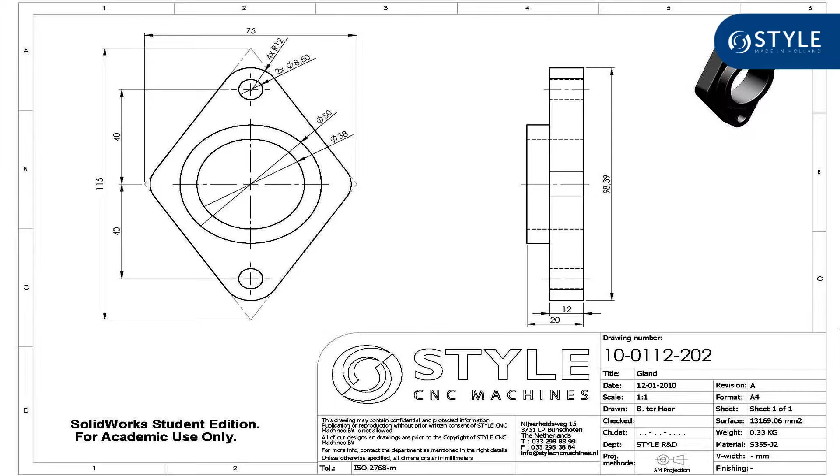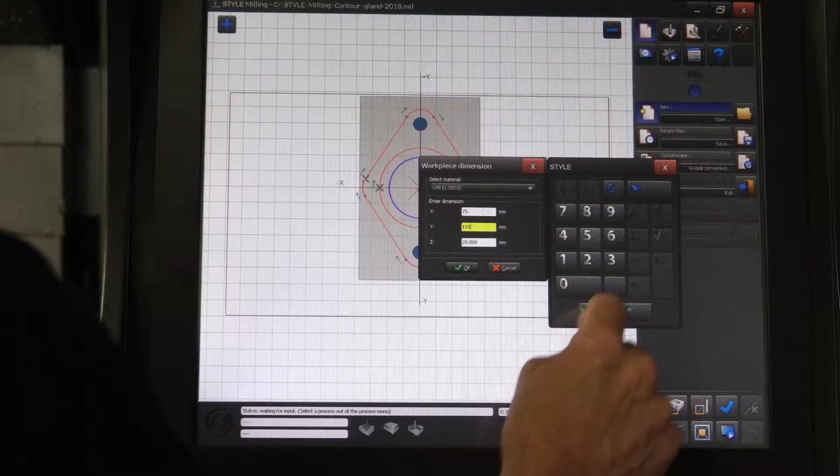Okay, I'm gonna show you how to program this workpiece. How do we start? It's Windows, so we start with File, New, and here we enter what kind of material we're gonna use and how big our material is. So the material is 75 in the X, 115 in the Y, and 20 millimeters in the Z. Here is the material. The origin I will put in the middle here.

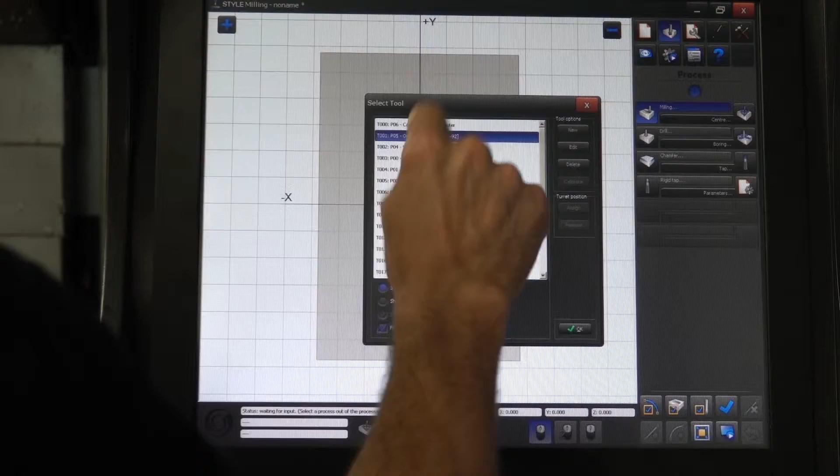Now I can choose my first process. First process is facing, it's a milling operation, so I select milling. Now I'm going to select my milling tool. This one is my milling tool. Press OK. And here I enter the cutting data of the milling tool.

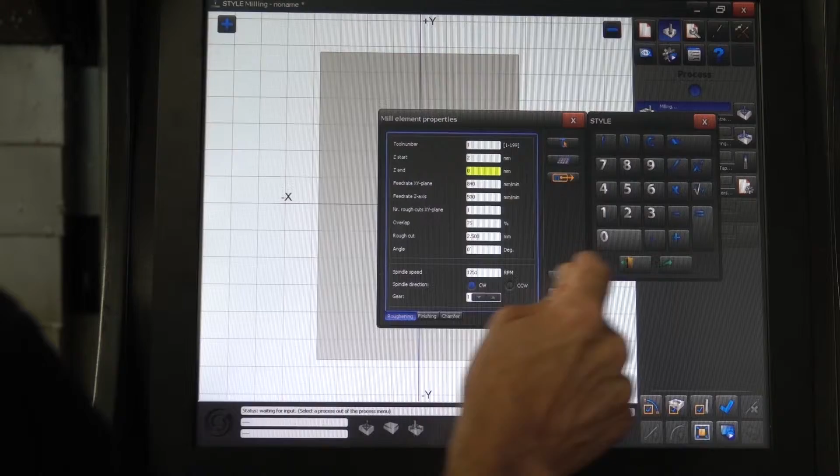But this already comes from the library, so I don't have to enter it. I only have to enter where to start. I will start at +2 above the material and go facing to 0. Here you see the mill. Now I go to Draw, menu number 2, and I select Face Material.

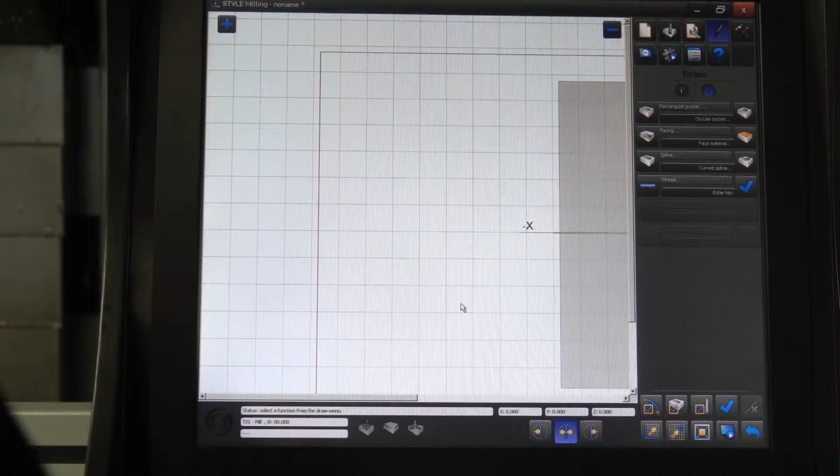Face Material. I want to have an overlap, let's say, of 95%. The direction in which we mill, press OK. And now you can see the milling cycle on the screen. First operation. Now we go to the second one.

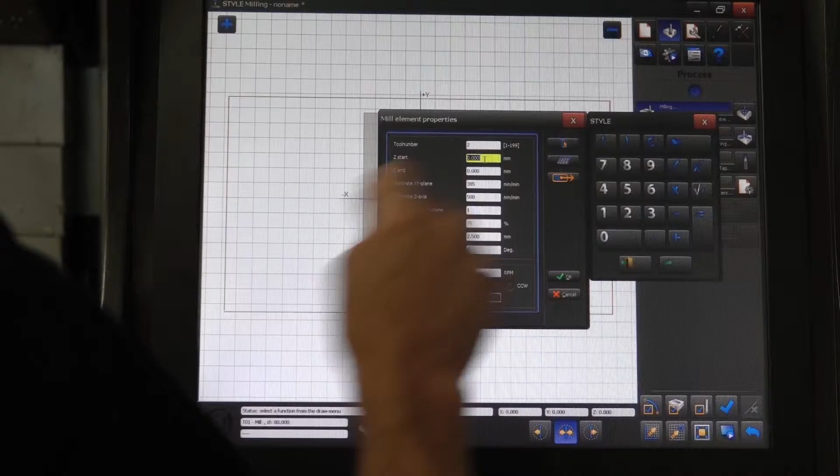Again, process, we go to milling. We select our tool, press OK. Feed rate and RPM are OK, so I only have to enter where to start. We start on 0 and go to -20. Now we press OK to confirm.

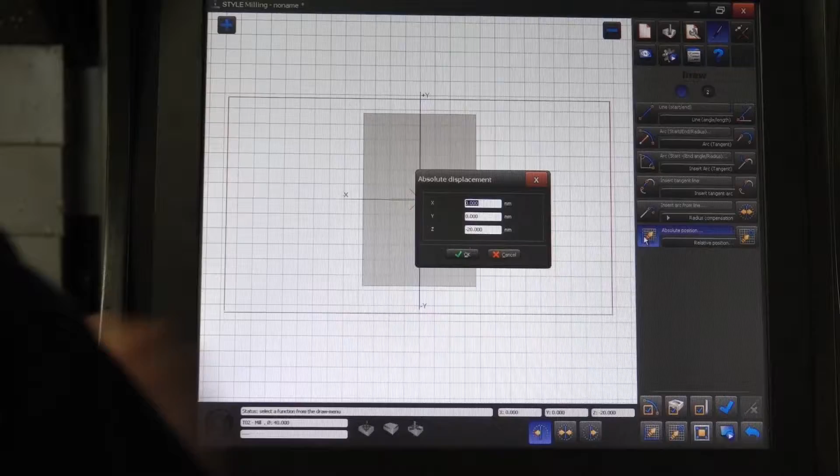First, before I start drawing, I will set my radius compensation on the left side, here. And now I start drawing, so I go to the start position of my contour. I go to absolute. The start position is -37.5 and 0. Okay, this is the start position.

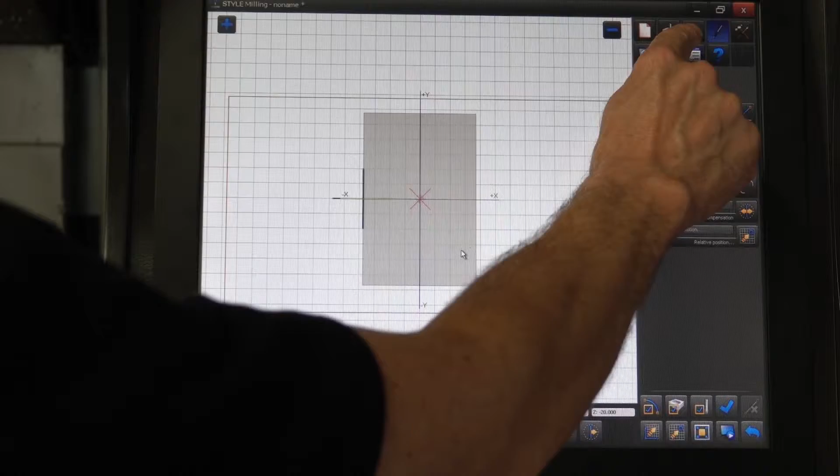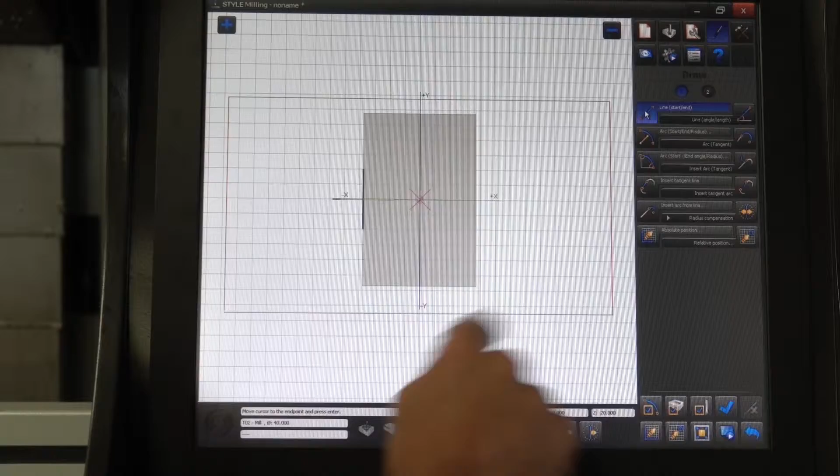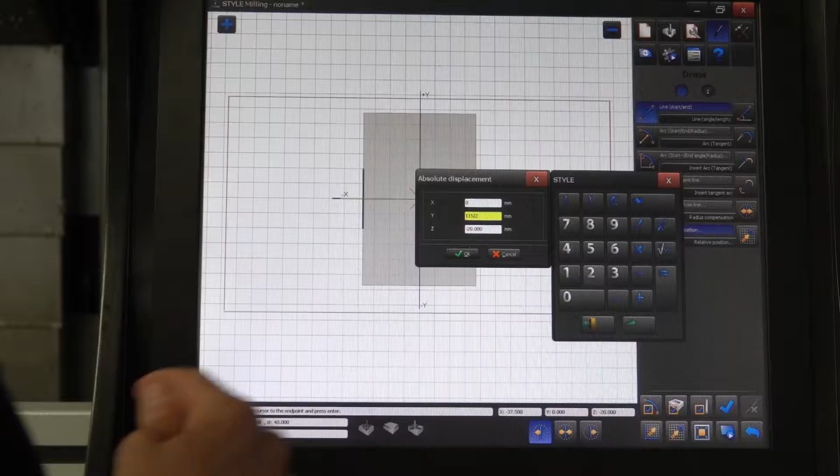And now I'm going to draw a line. So I go to Draw, Line. The line is asking for the start point. I am on the start point, so I confirm with enter. Now I have to go to the end point, so I go to absolute. And now my end point is x0 and 115 divided by 2. Okay, there it is. Confirm with enter.

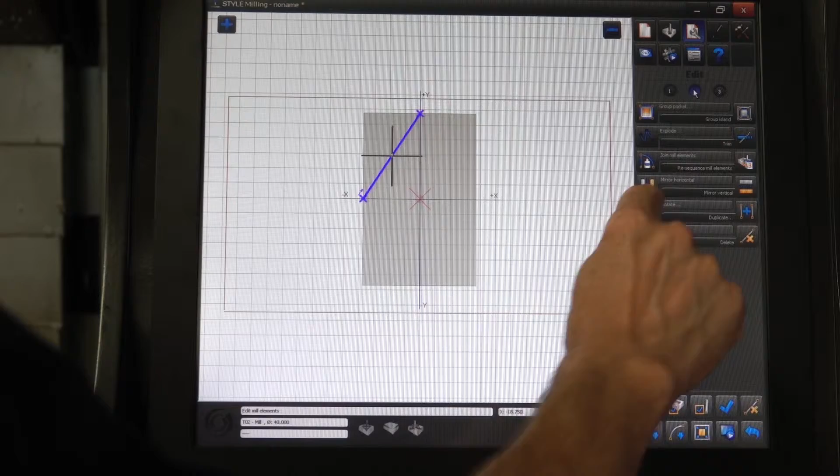And now I have to make a complete triangle, so this line, this line. So I'm not going to draw, I'm going to use mirror. I'm going to select this line. I go to edit, the second menu, and then first I'm going to mirror horizontal. Okay, and now I'm going to mirror vertical. Okay, and there you have your contour.

Now I have to insert the radius. So I go to edit, insert arc, radius, and the radius has to be 10. There it is. Okay, this is the first contour with this mill.

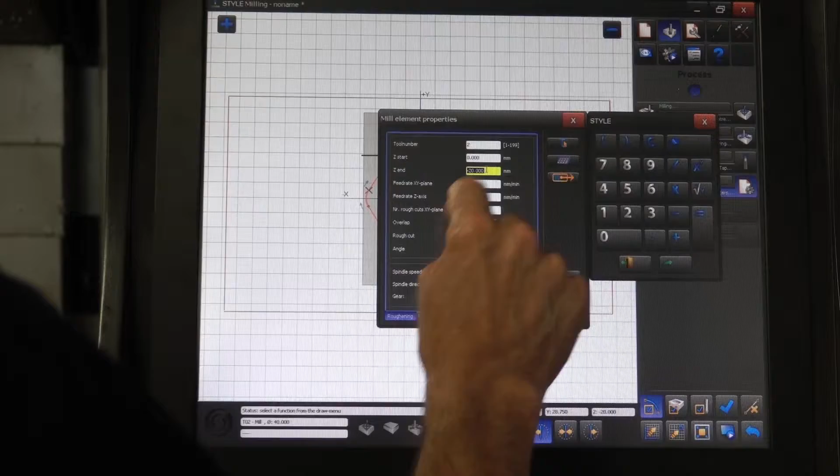We're going to make a second contour, but first I have to change the parameters. This one has to go to -8, so not to -20 but -8. Okay, radius compensation is on the good side. I go to the starting point, that's the center.

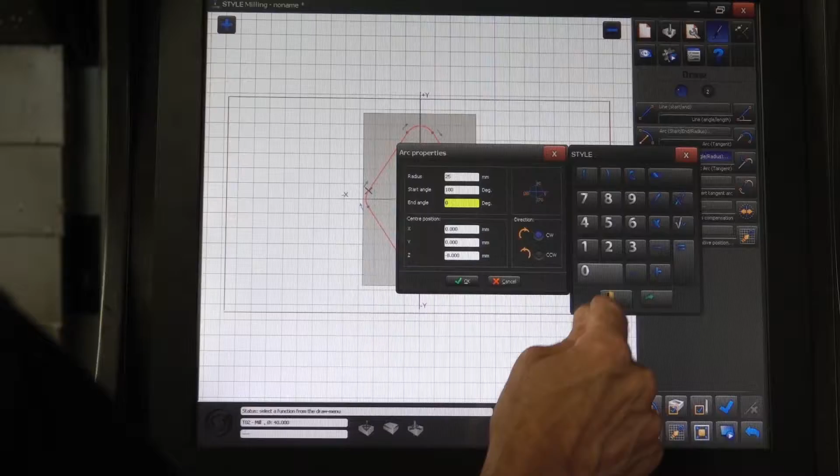Now I go to Draw, and the first arc will be one with a radius, a start angle, and an end angle. Now the radius of the first arc is 25, start angle 180, end angle 0, so half a circle I'm going to draw.

Okay, and now I'm going to draw the second half with another option. So now I only enter the radius and the direction. And now I'm going to say what's the start point. This is my start point. Enter. This one is my end point. Also confirm with enter.

And now I can choose between two arcs. I want to have this one. Okay. And there it is.

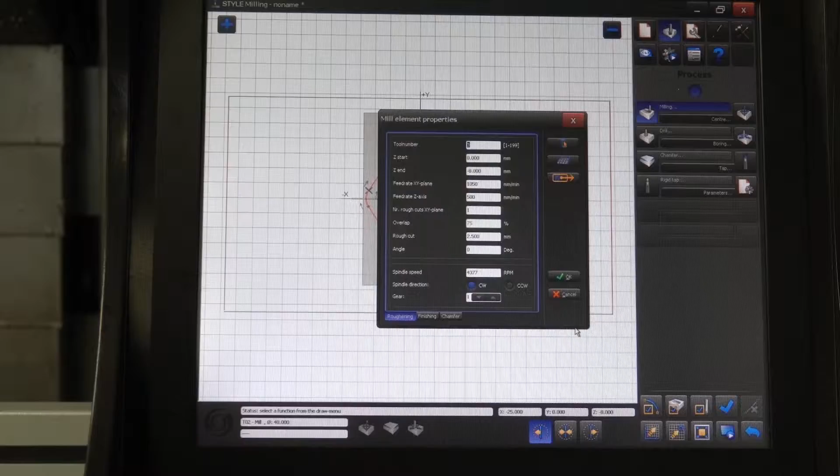Now two more operations, one milling. So we go to process, milling. We select the correct tool, a tool of 25. Okay, and this tool has to go to -20, or maybe a little bit further, 22. Feed rate and RPM are okay, so okay.

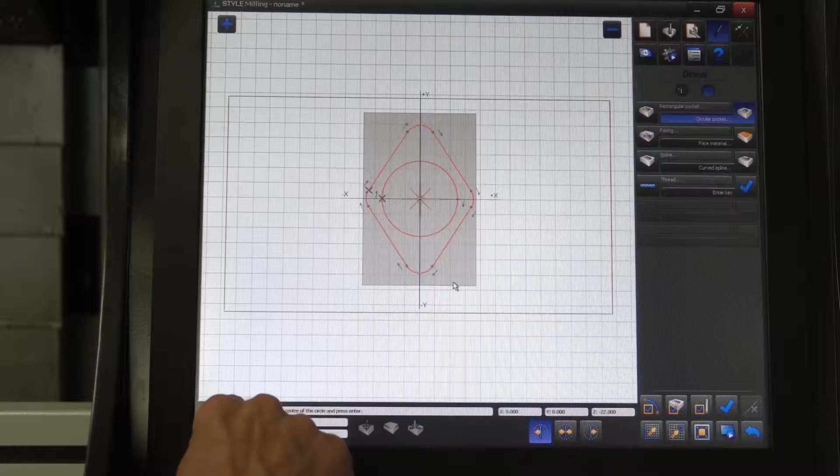Also with this tool I will start in the middle and make a pocket, a circular pocket. So I go to draw, second menu, and make a circular pocket. Now the pocket has to go inside out counterclockwise with an overlap of 50%. Now I have to move the cursor to the center of the pocket. It's already there, so I press enter.

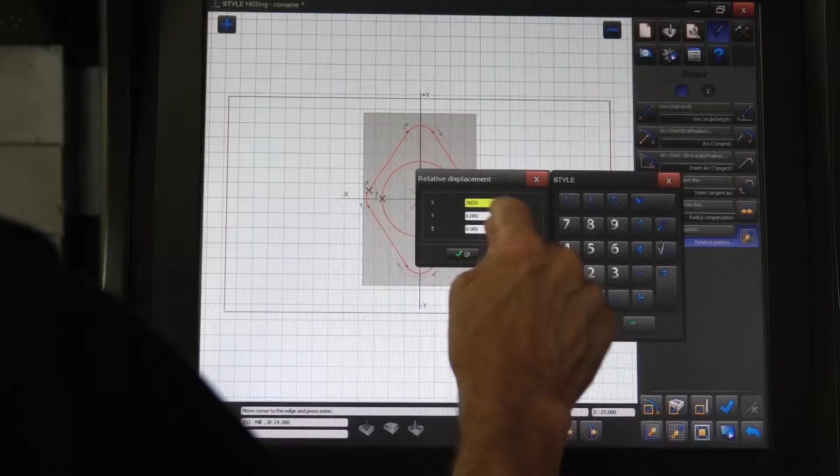Now I have to move to the edge of the pocket, so I will do that with relative. Now the diameter of the pocket is 38, so we have to move 38 divided by 2. There it is. Confirm with enter. There is our pocket. The last process is drilling.

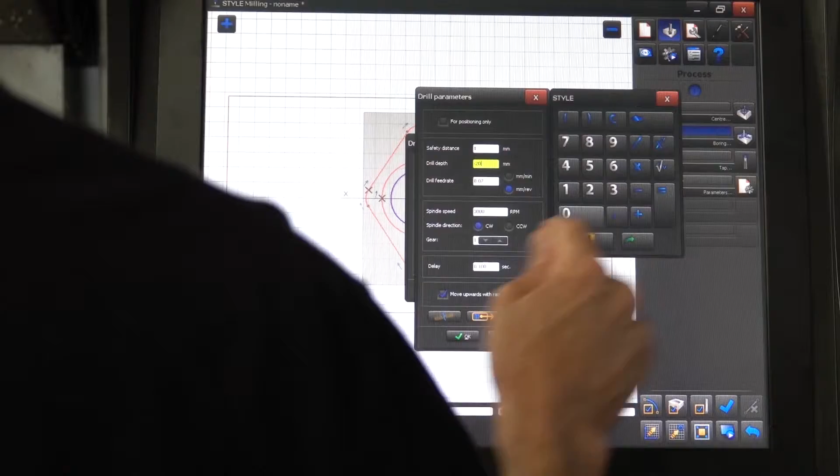So I go to process, drill. I select my drill, press OK. I enter where to start, +1, and I have to go to -20 or more. Let's go to 24. Now the parameters already came from the library, so the rest was okay.

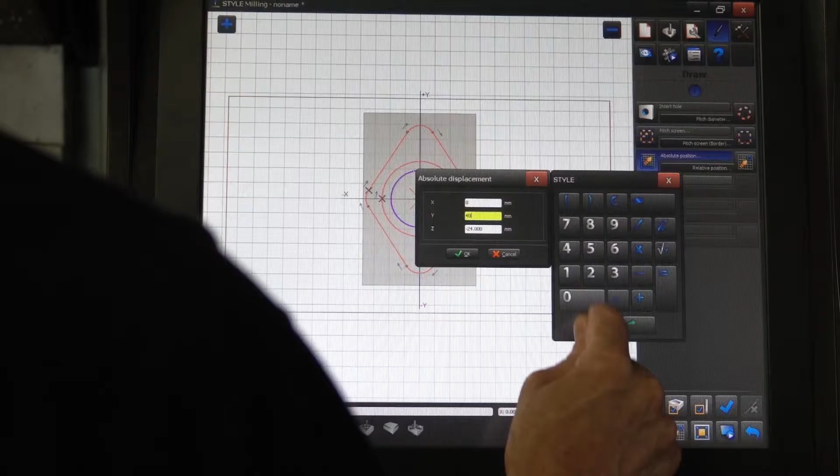So confirm, okay. The drill is on the screen, and first I have to move the drill to the correct position. X is 0, and Y is 40. So here you can see the drill. And to make a drill hole, I press enter, and there is a drill hole.

We have to make two, also one over there. Let's use mirror again. So I'm going to select the hole. I go to edits, and I'm going to mirror vertical, press OK, and there it is.

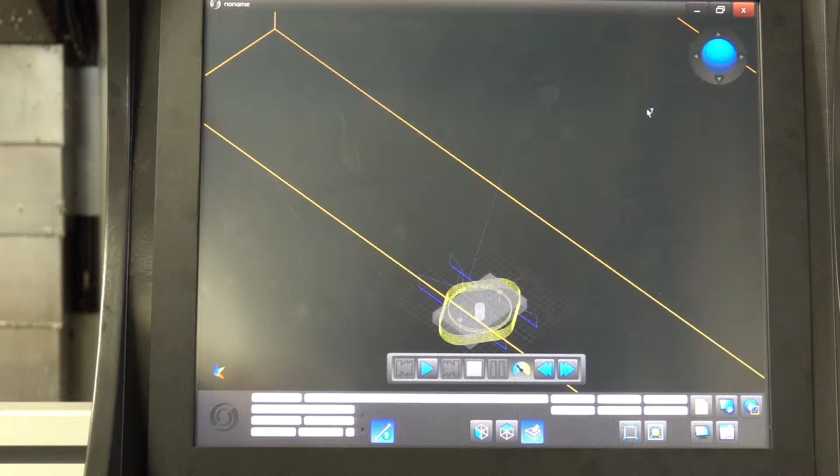This is the drawing. Now before I can execute this drawing on the machine, I have to go to output. And I have to set my tool position, maybe double check my cutting data. And of course, before I go to the output, I can do a simulation, this one. And what you see now are all the movements that will happen on the machine, and also the end switch region, so how big your workpiece can be.

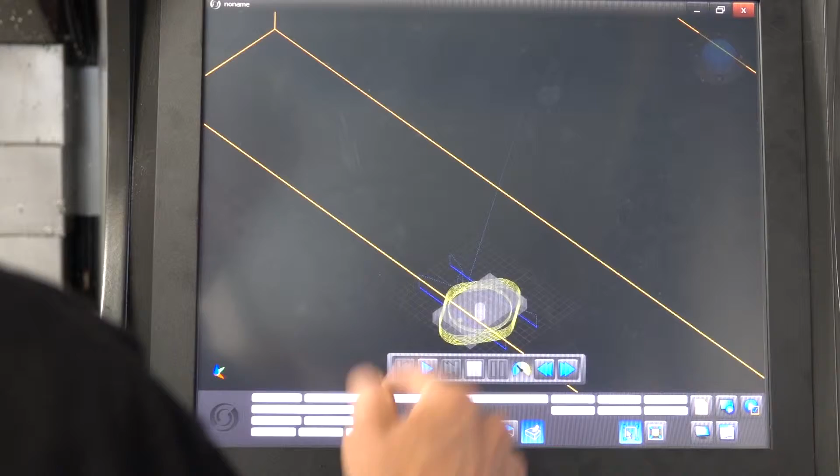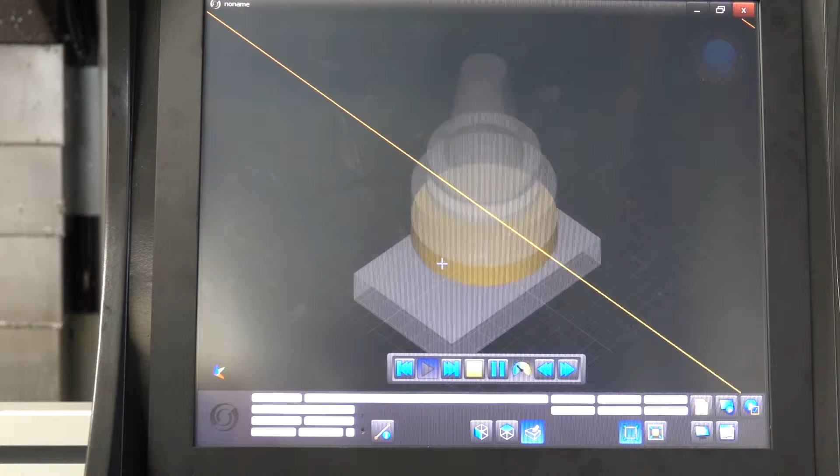First I'm going to zoom only on the product. Here it is, and I can play the complete product from start. So first thing will be facing. And the tool will now move with the exact same speed as on the machine, but for this movie it takes too long, so we speed it up. That was facing. Now we do the other mill, speed it up.

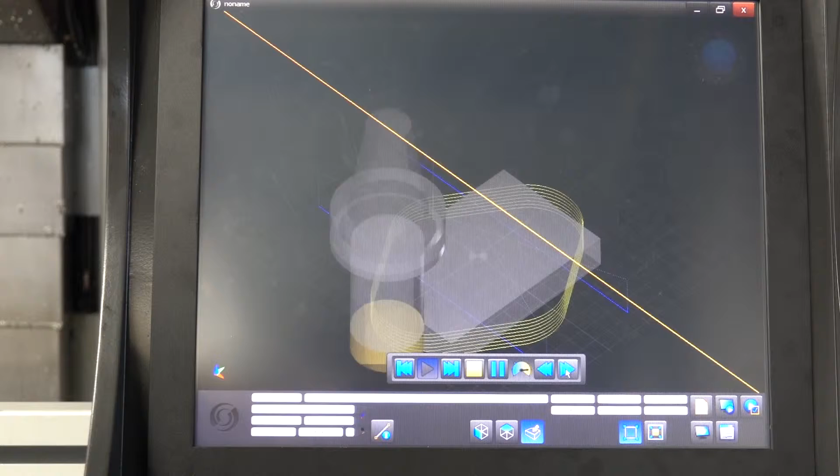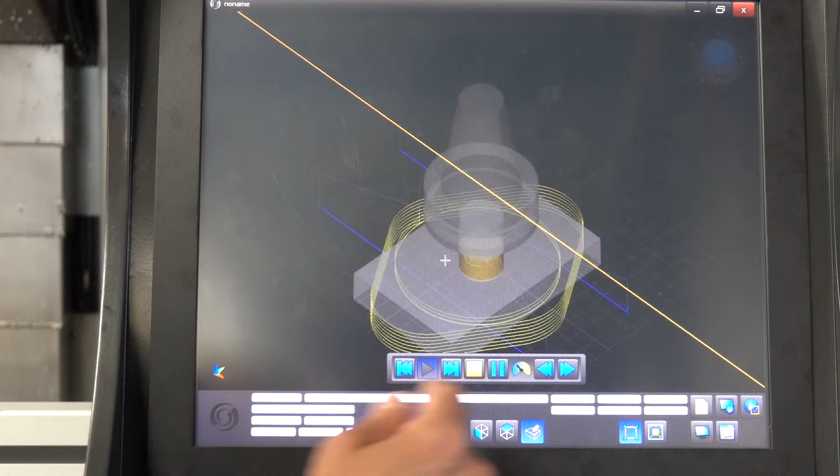And here you see the total time, here you see the type of mill, the time, the current time. Next tool. So this is the circular pocket, speed it up. And the last operation, drilling, also a little bit faster. And that's it. Looks good.

So quit, everything is okay. So now we can go to output start and start our machine. That's how easy it is. But we can do more.

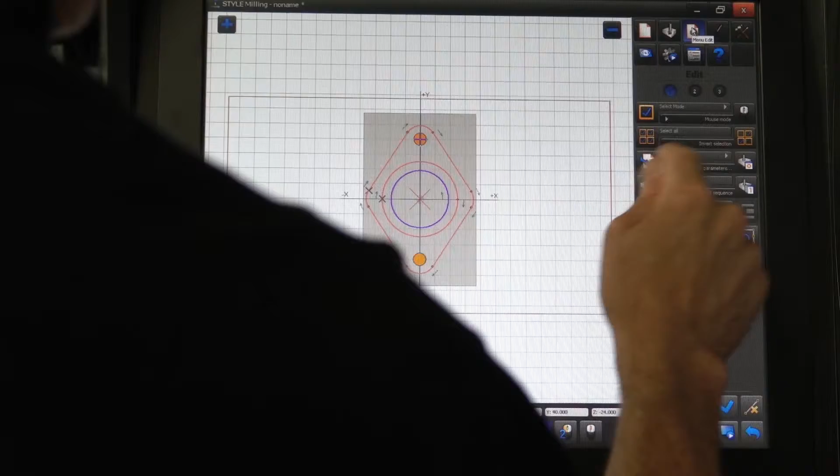So instead of drawing ourselves, we can also go to insert. And we can, for example, insert a complete drawing, a DXF drawing, or draw something with free contour. So if you have unknown values, difficult drawings, you can use the free contour program.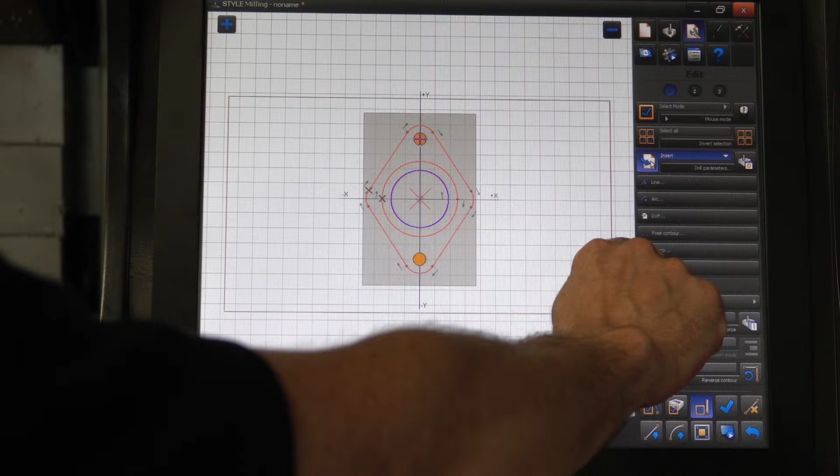The real CNC users know this, Macro. It's quite difficult, but you can do very nice things with it. And this is a new feature, the free shape. You can define your own shape with parameters, and then you also can insert all these different shapes into your drawings.

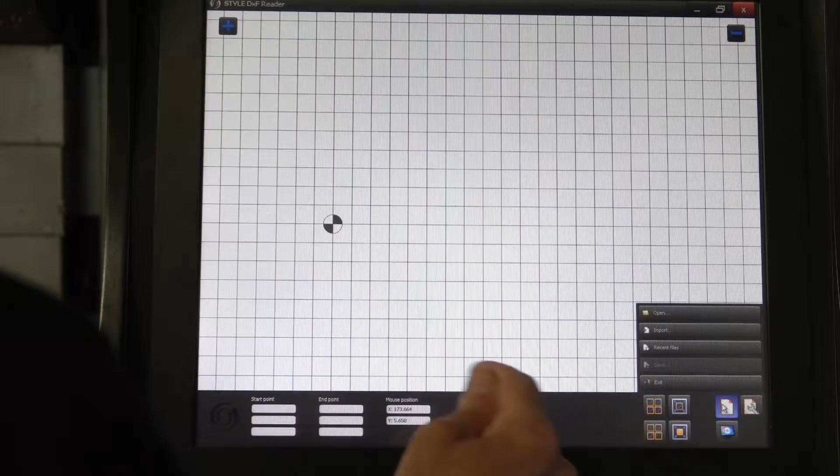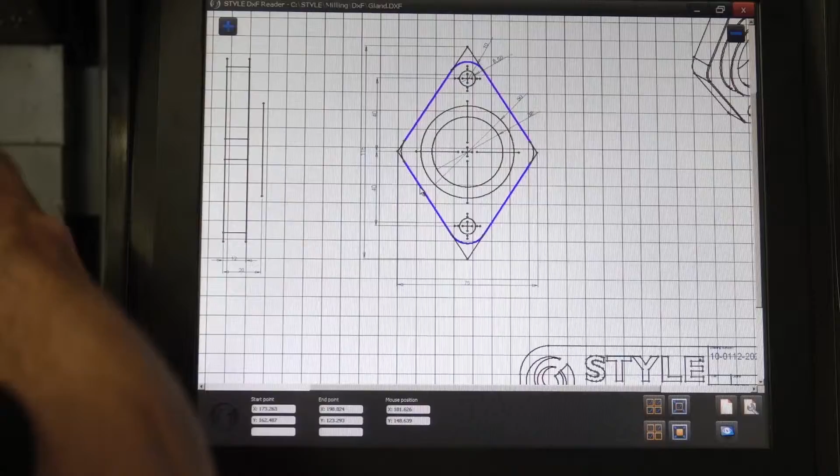Now I will show you very fast how the DXF looks like. I go to DXF Reader, I open a DXF, the DXF of this particular workpiece. And now what I can do, I can zoom in, zoom out of course, like this. And now I can select in this DXF the elements that I want to draw. So instead of drawing myself, I can select all these elements, and then the elements will be imported in the drawing. I press OK. I'm not going to do it now.

And then instead of drawing yourself, you can import a complete DXF. So it's not only an easy control, you can do lots of nice things with it.